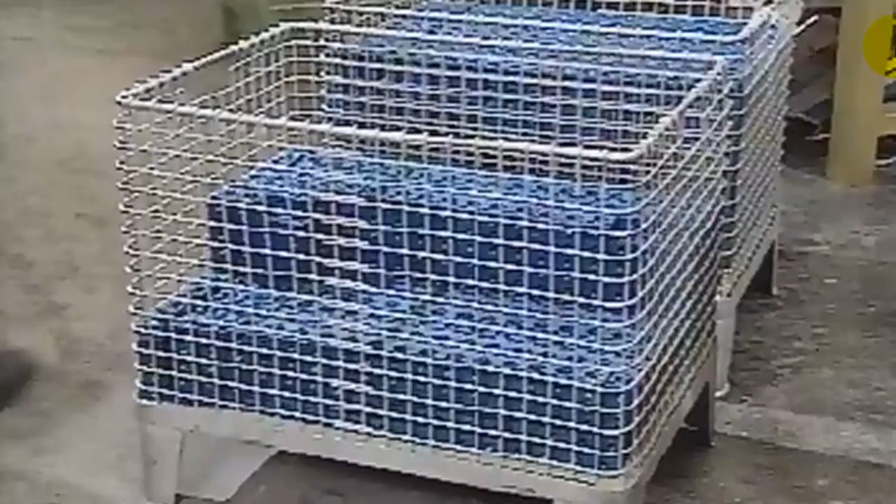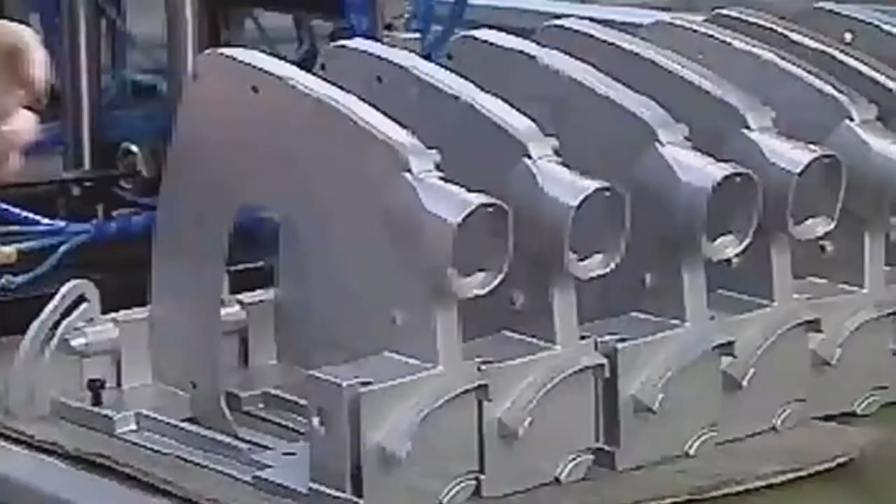Every manufacturing process involves a series of constantly recurring operating steps. Workpieces must be loaded, clamped, machined, or conveyed on to the next station, always in exactly the same way. When performed by muscle power alone, these operations become tiring and time-consuming. That's why jobs of this type are more and more becoming a thing of the past.

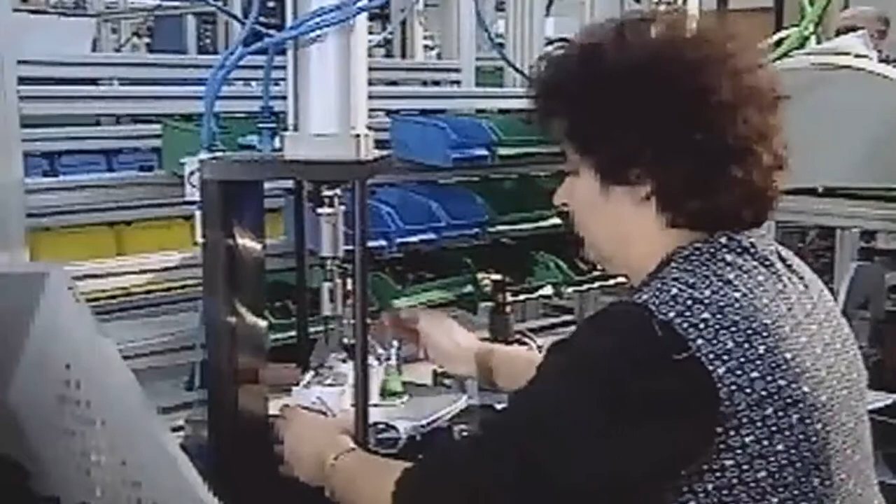Mechanization and automation have become key words in industry today. They both refer to using the right kinds of machines and equipment to relieve personnel of strenuous routine activities.

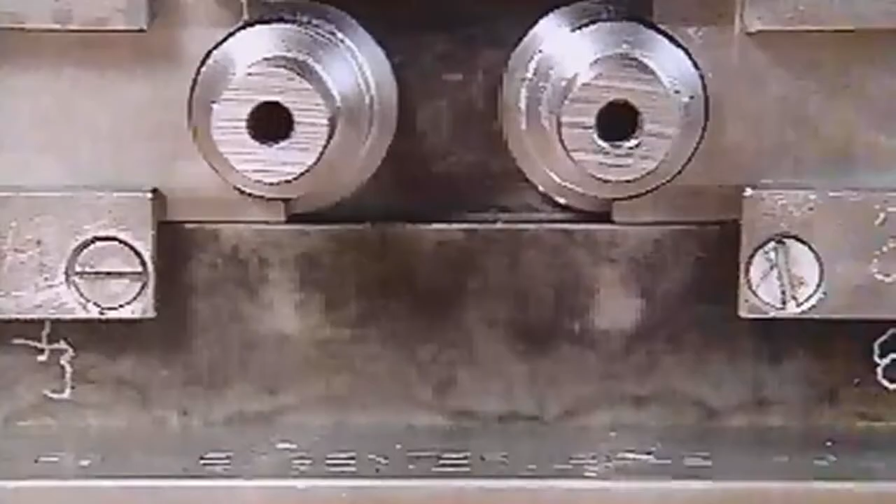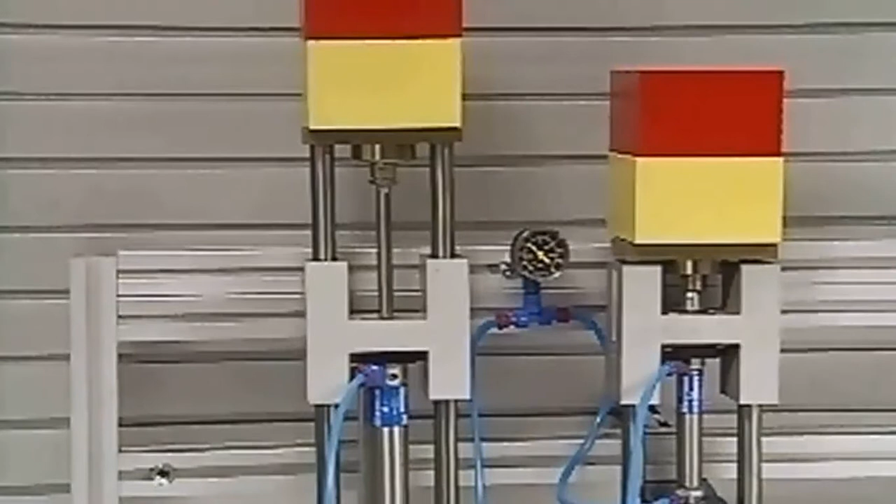In this experiment, the cylinder is not capable of raising the load. Not a problem for the left-hand cylinder, even though the same working pressure is being applied to both. The reason is that the left-hand cylinder has a larger diameter.

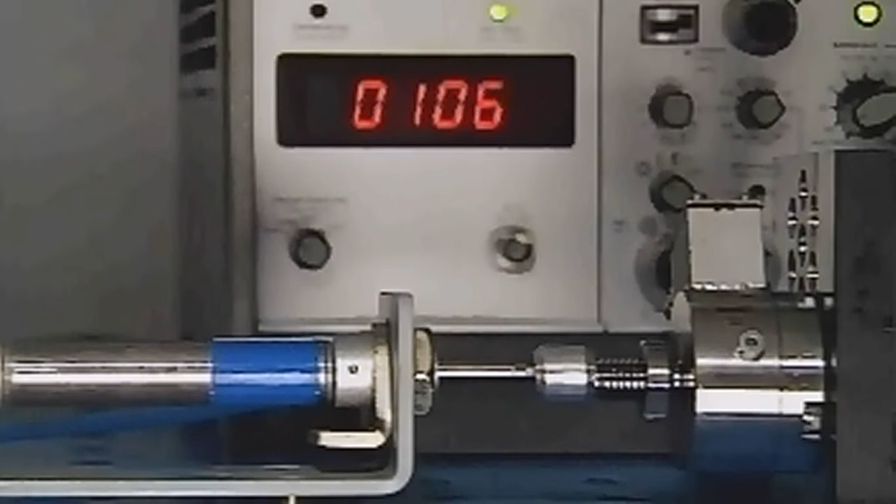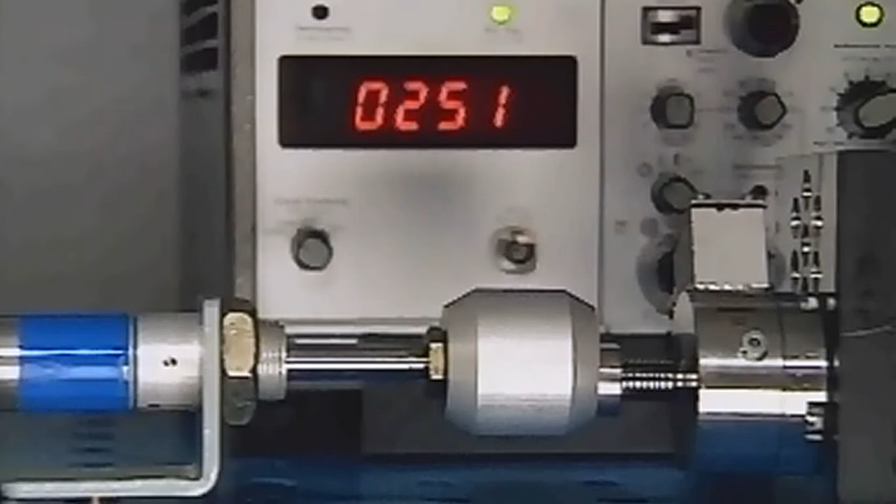This experiment shows the same thing again. At an identical working pressure of 600 kilopascals, this small cylinder, with a piston diameter of 16 millimeters, registers about 106 newtons on the scale, whereas the larger 25 millimeter piston exerts a force of about 251 newtons. And this cylinder, with a piston diameter of 32 millimeters, exerts about 420 newtons.

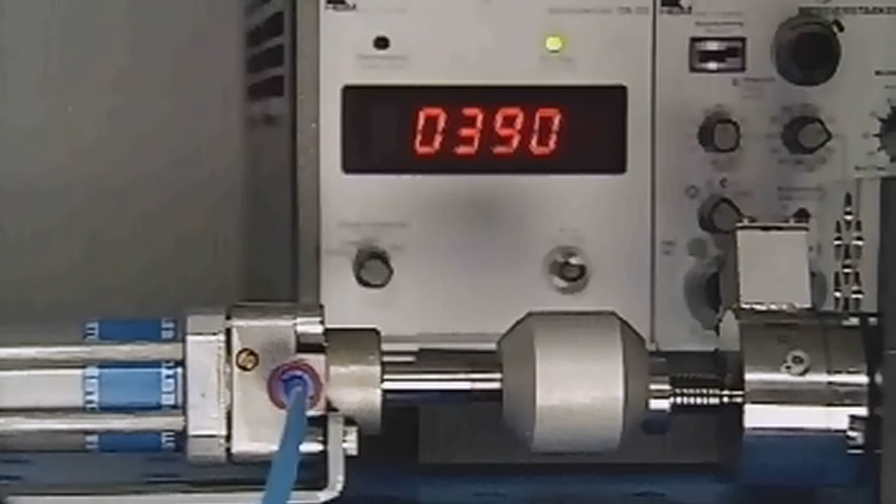This can all be reduced to the formula: force F is equal to the surface area of the piston times the operating pressure.

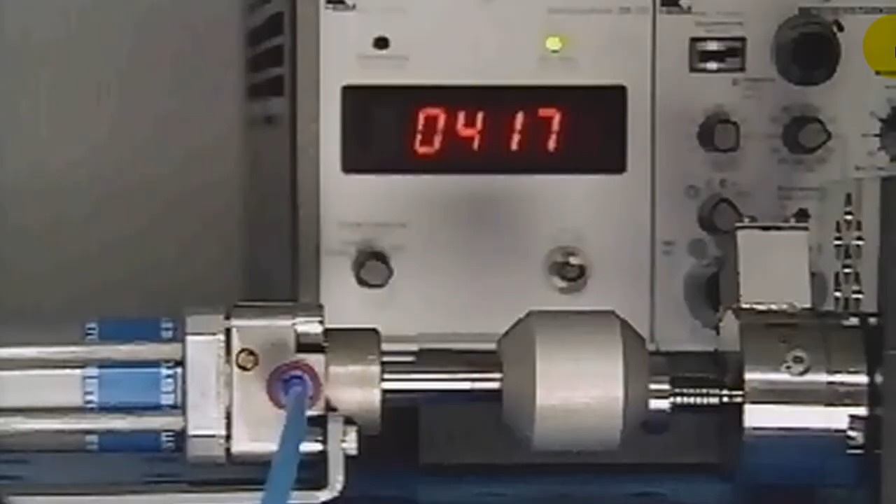An atmospheric pressure P at prevails over the entire Earth. Although the pressure varies slightly due to geographical and climatic conditions, it's taken as a reference parameter and for technical purposes set at 100 kilopascals or 1 bar.

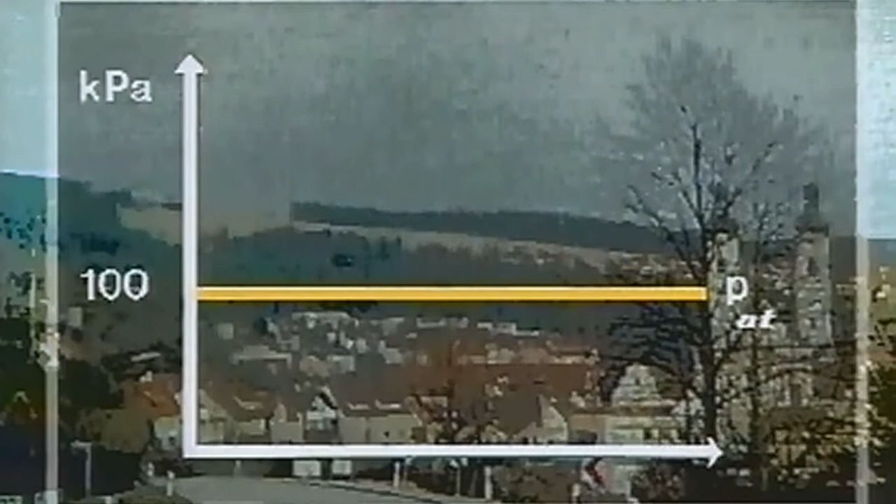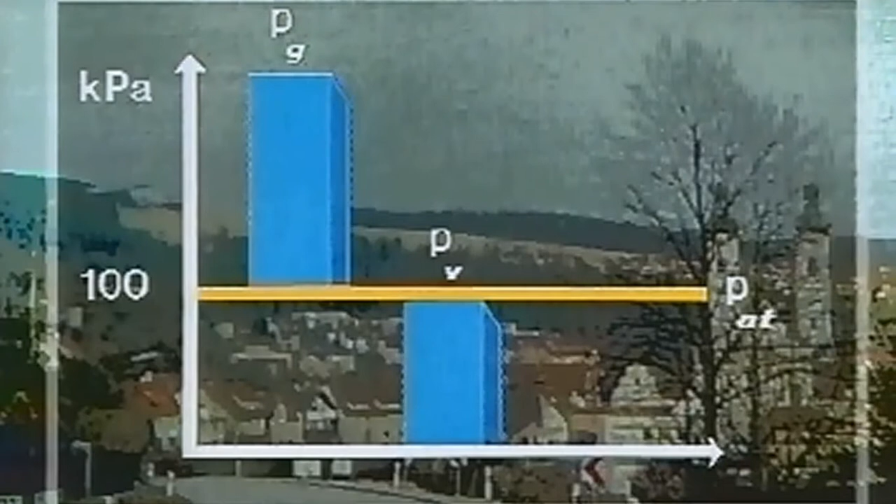Any higher pressure is described as gauge pressure PG. This pressure is normally indicated by the pressure gauges of pneumatic systems. Pressures lower than 100 kilopascals are described as vacuum PV. Pressure P absolute is calculated beginning at zero pressure.

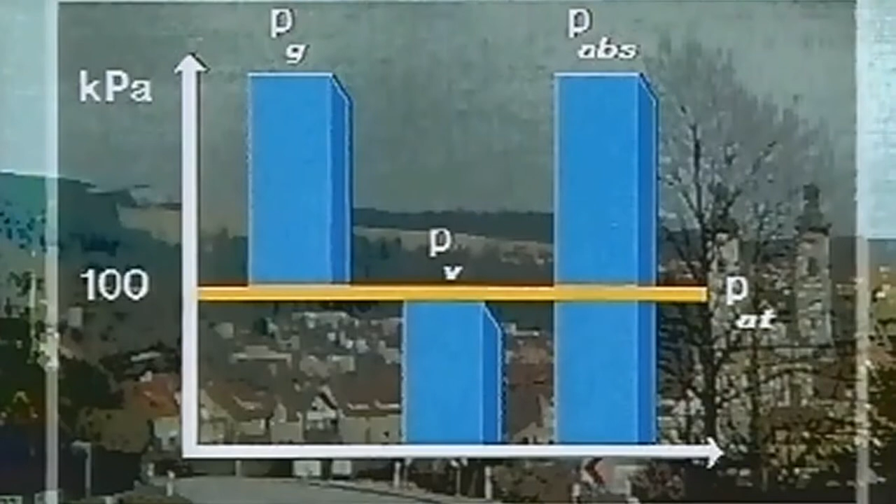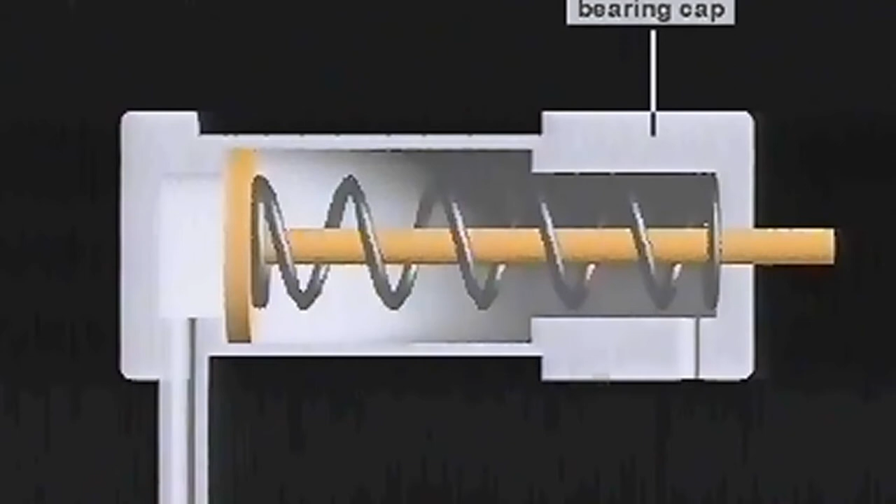A single-acting cylinder is made up of the following component parts: the base cap, the bearing cap, the cylinder barrel, the piston and seal, the piston rod, and the return spring.

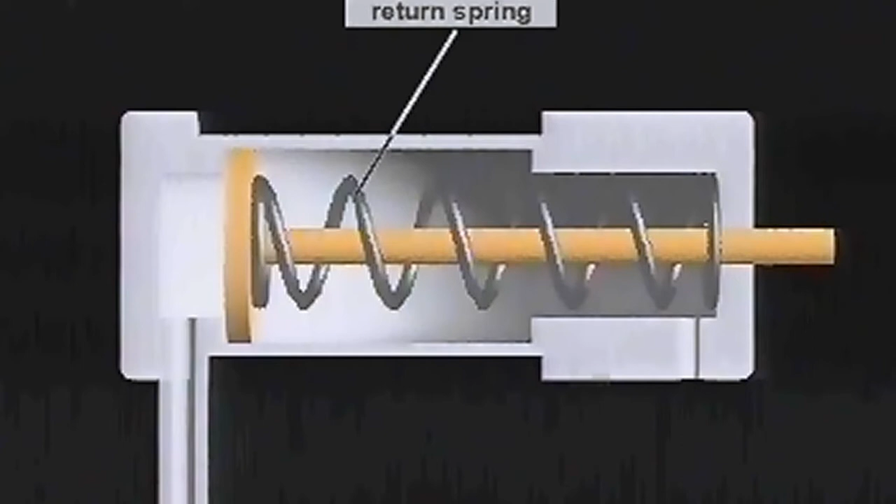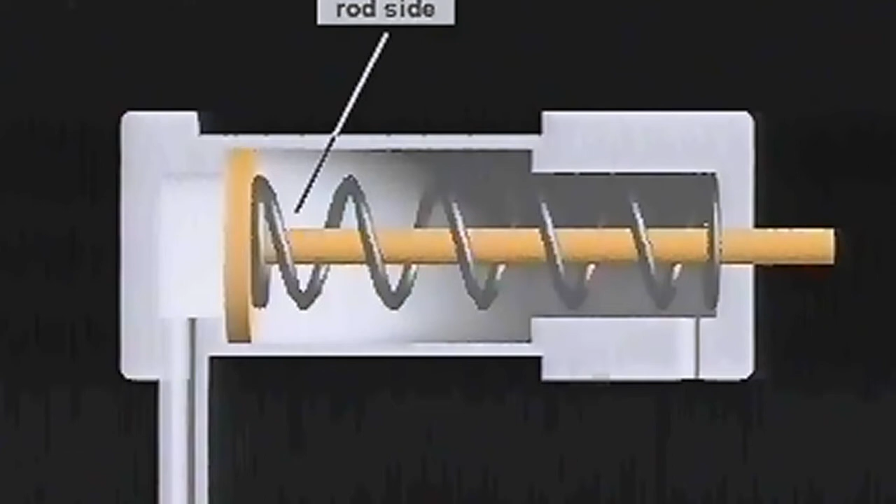A distinction is made between the piston side and the rod side. There must be no pressure buildup on the rod side during the forward stroke, which is why there is an exhaust hole in the bearing cap.

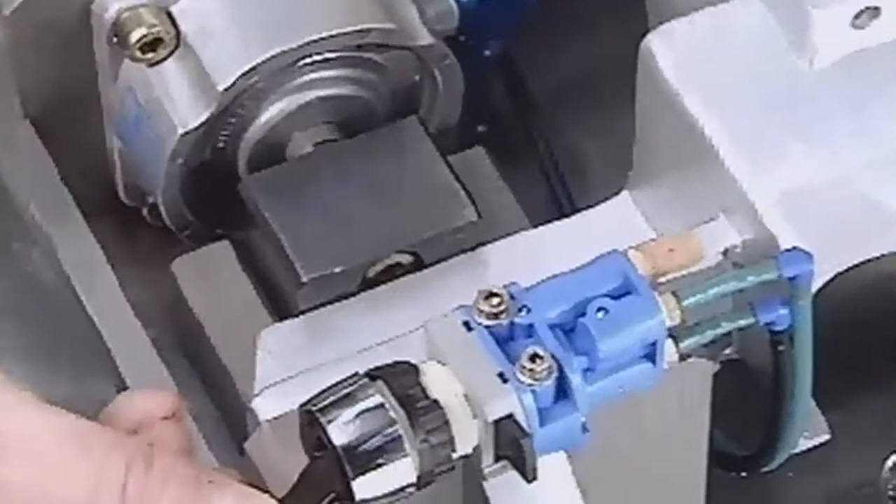These single-acting cylinders are being used for clamping. And this cylinder for ejecting.

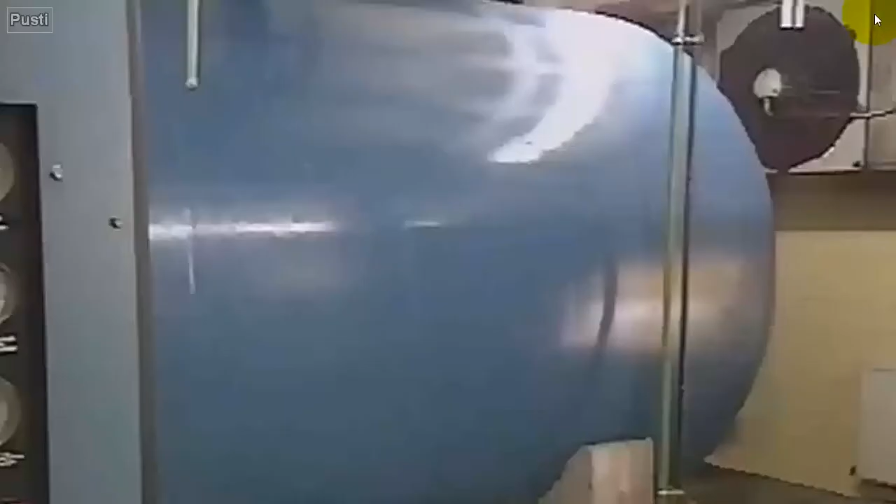The compressed air, which heated up during compression, is cooled in the compressed air receiver. The resulting condensate is drained off.

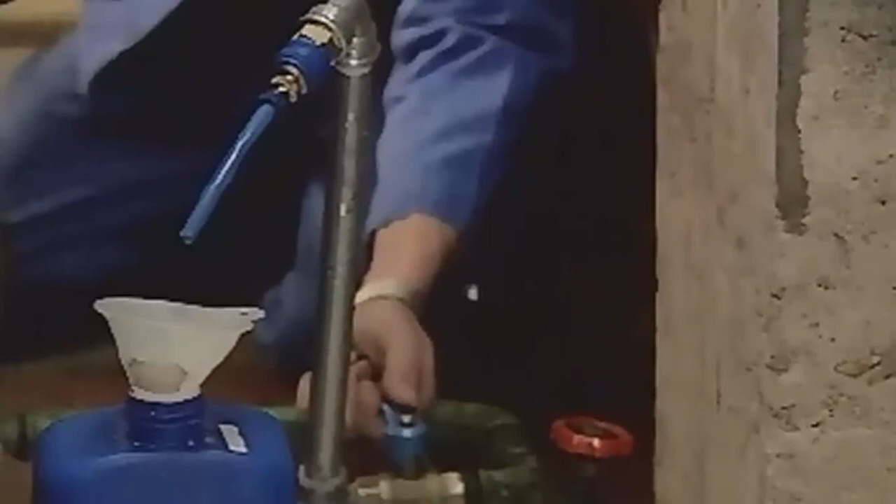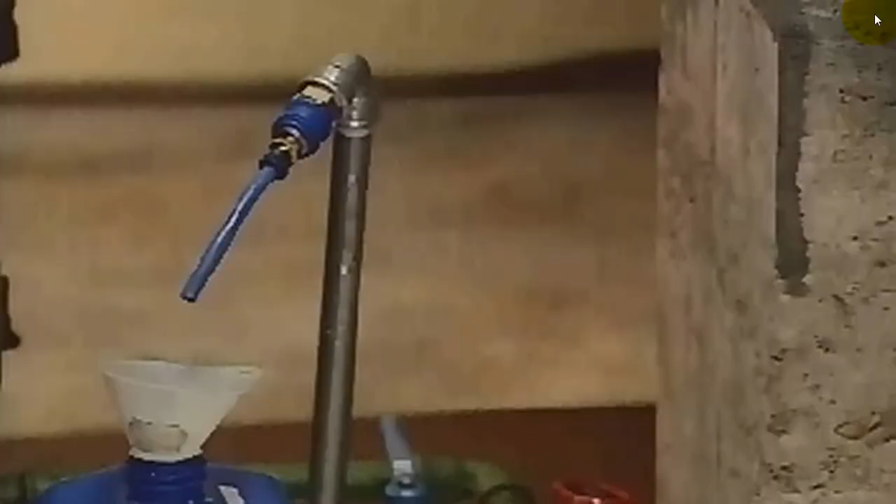And now to the second type of cylinder, the double-acting cylinder. Unlike the single-acting cylinder, it has two compressed air ports.

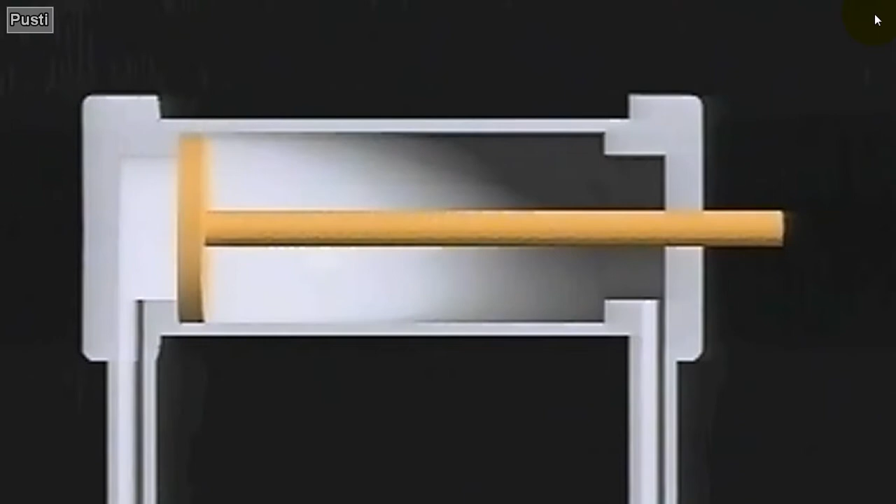Compressed air moves this piston in both directions, which means that double-acting cylinders can perform work on both the advance and the return stroke.

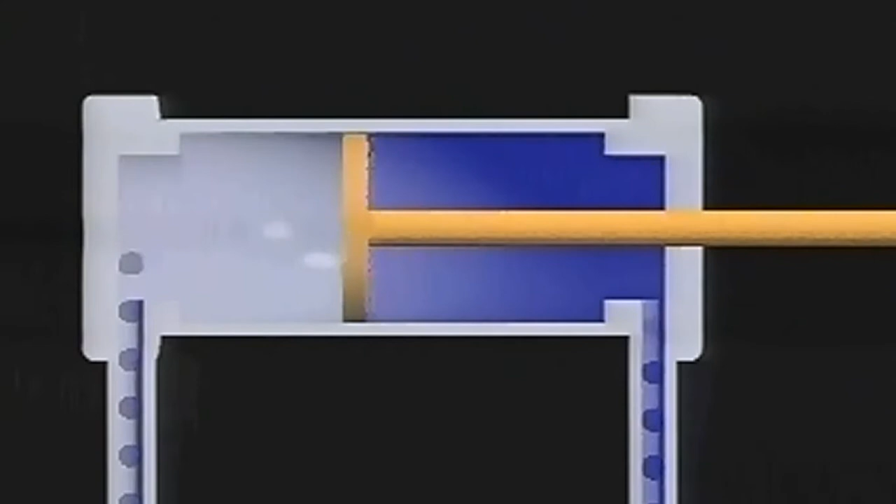The force exerted on the return stroke is less than the force on the advance stroke. This is because the effective surface area on the rod side of the piston is reduced by the area of the cross-section of the piston rod.

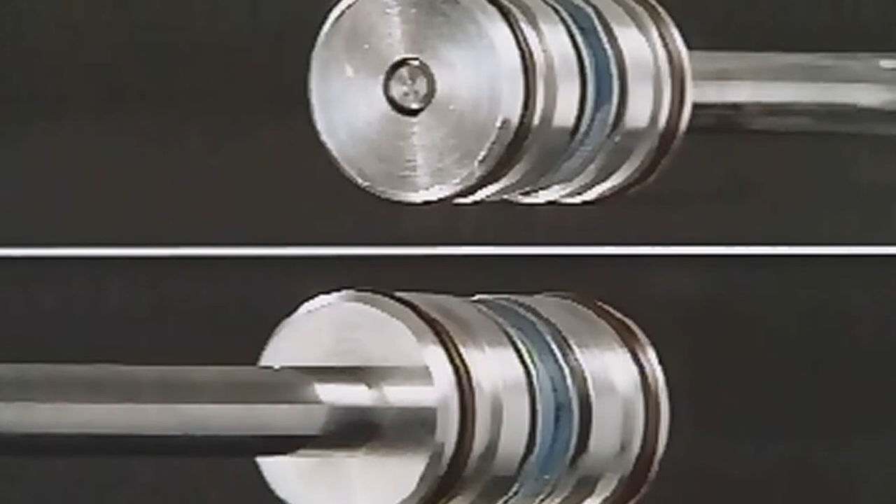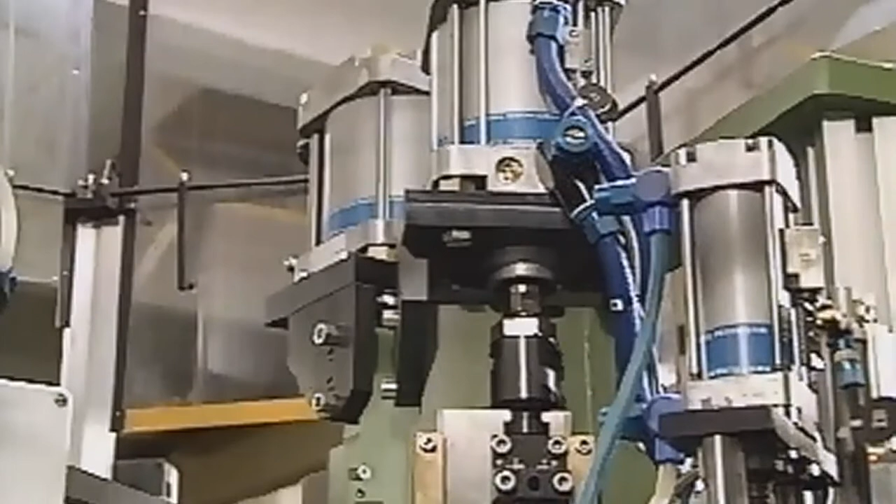Because of the weight of this tool, work has to be done on both the advance and return stroke. Here we need a double-acting cylinder.

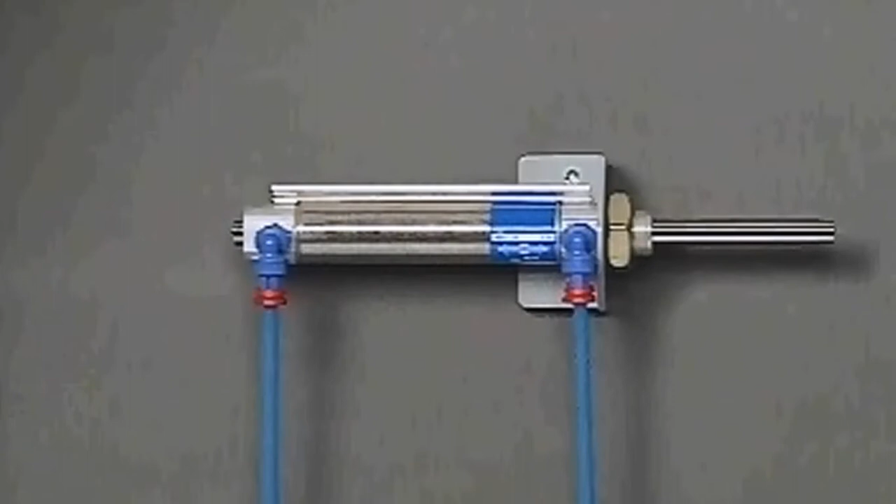Now let's take a look at a few special types of cylinder, all of which are derived from the double-acting cylinder. For example, cylinders with double-ended piston rods.

Two-point bearing support makes for precision rod guidance and greater lateral load-bearing capacity.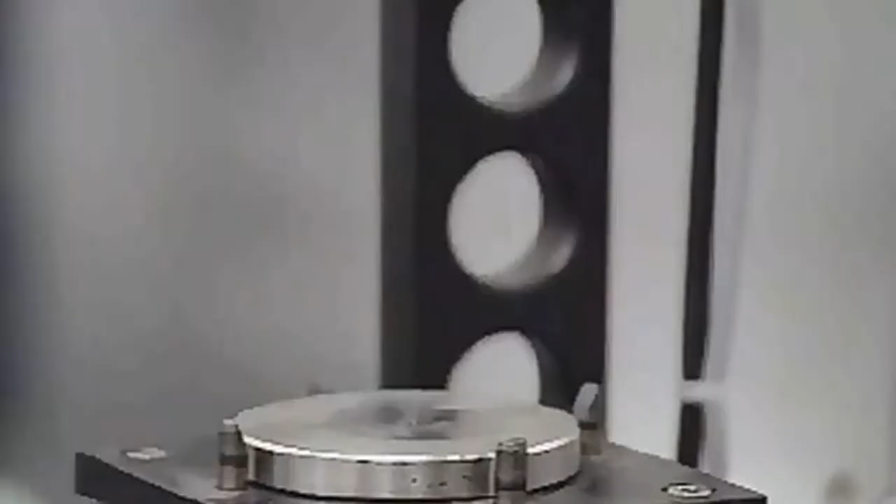In this cylinder, the partial vacuum needed for a suction cup is supplied through the hollow piston rod.

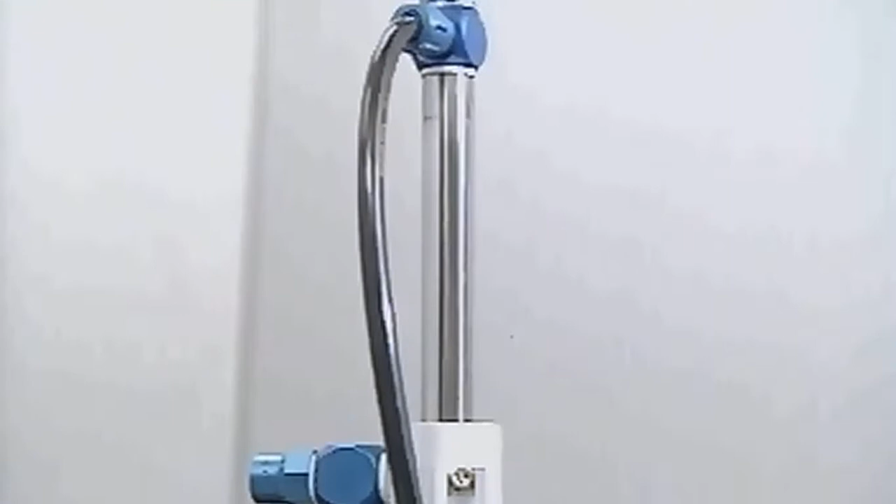This cylinder has no piston rod at all. It's connected by permanent magnets to the outside of the cylinder barrel. This way, the slide moves whenever the piston moves.

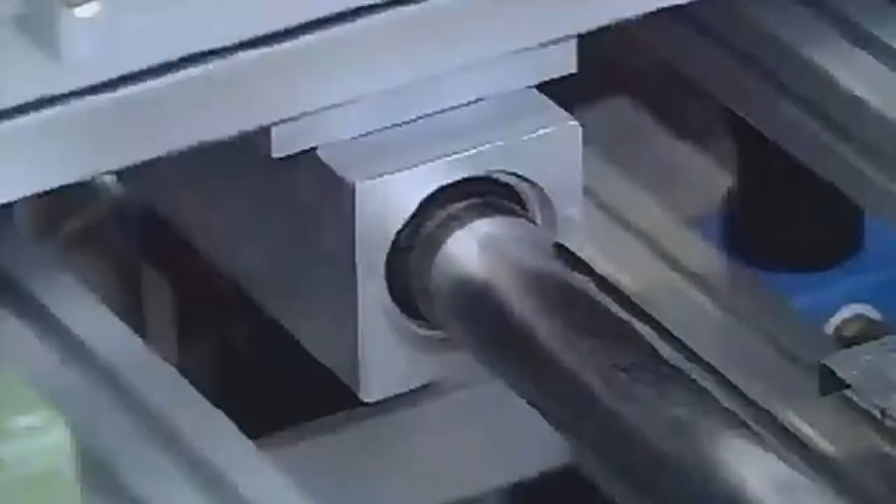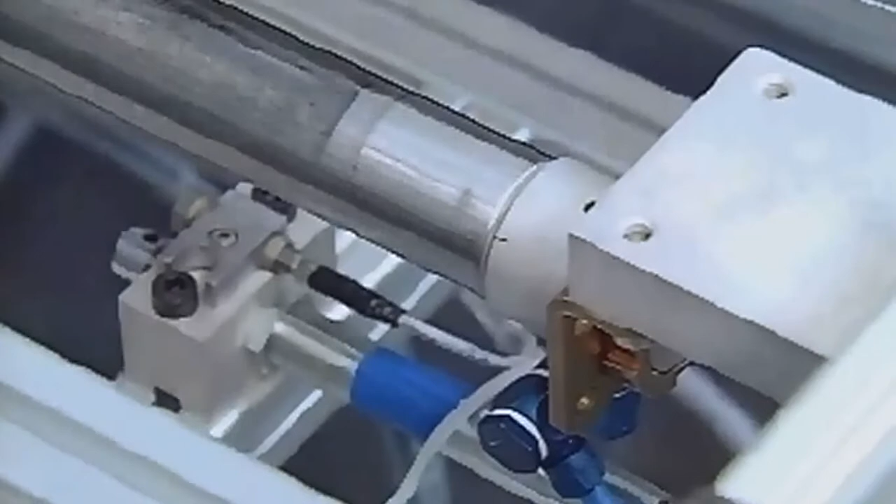Rodless cylinders can be used for extremely long stroke lengths of up to 10 meters.

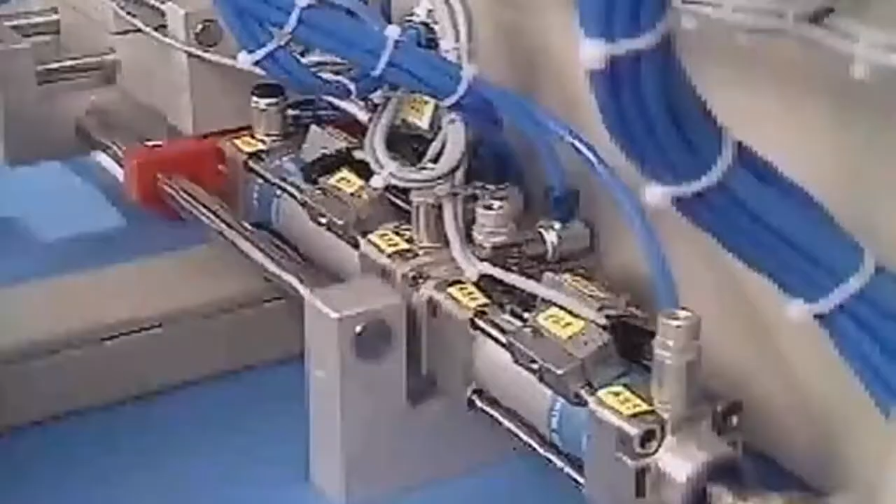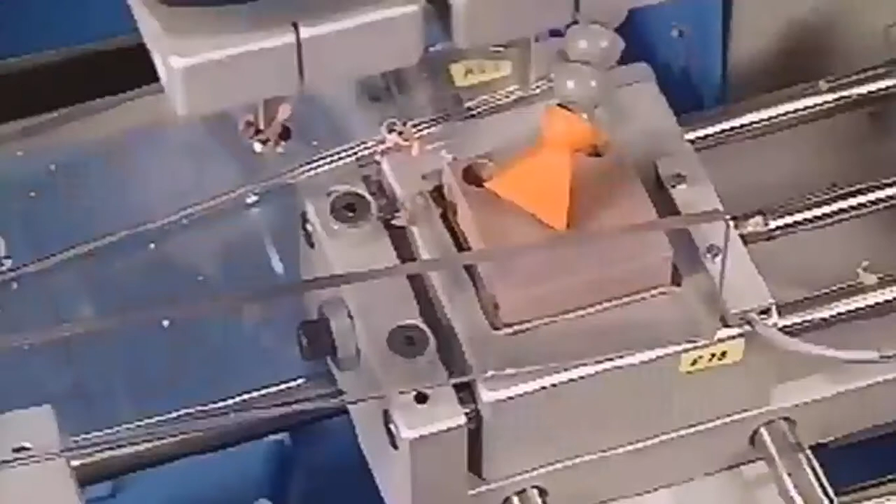Another special type of cylinder is the multi-position cylinder, which consists of several double-acting cylinders joined together. The one shown here has two sub-cylinders with different stroke lengths, making it possible to move the workpiece into 4 different machining positions.

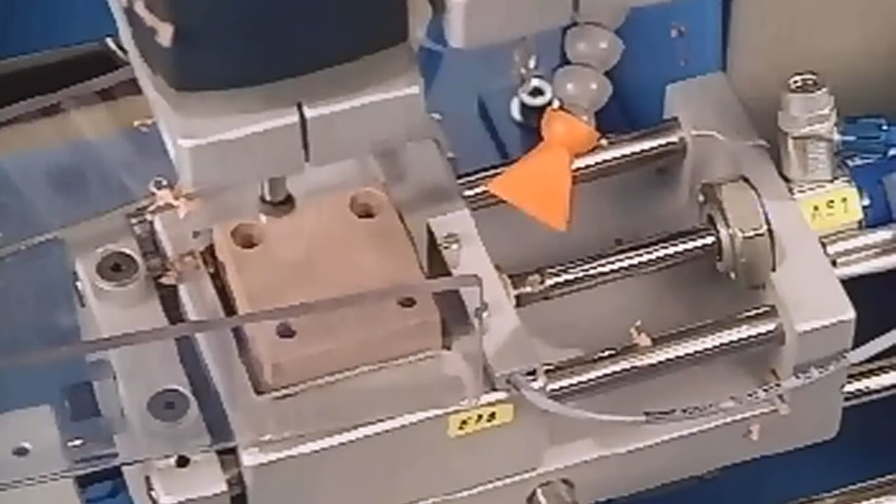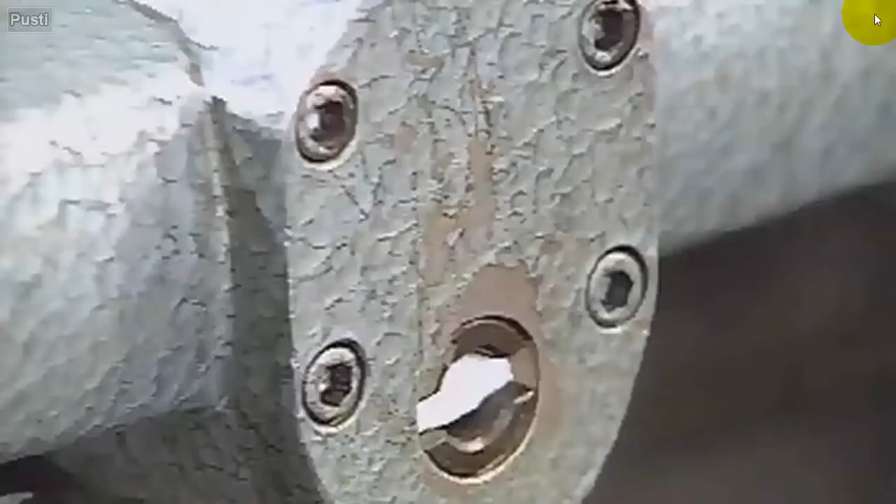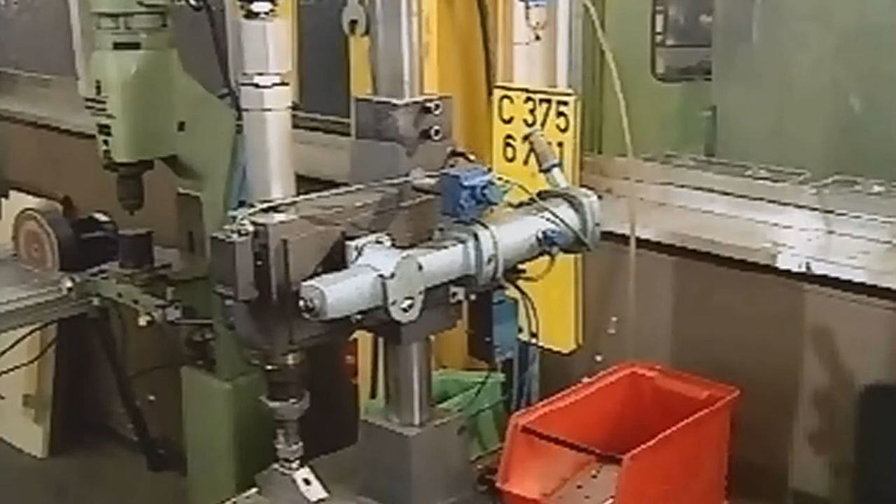If a rotary drive unit is needed, the cylinder's linear motion can be converted mechanically into rotary motion. If this conversion takes place within the cylinder itself, we speak of a rotary cylinder. The piston rod of a rotary cylinder has a tooth profile that drives a gear wheel.

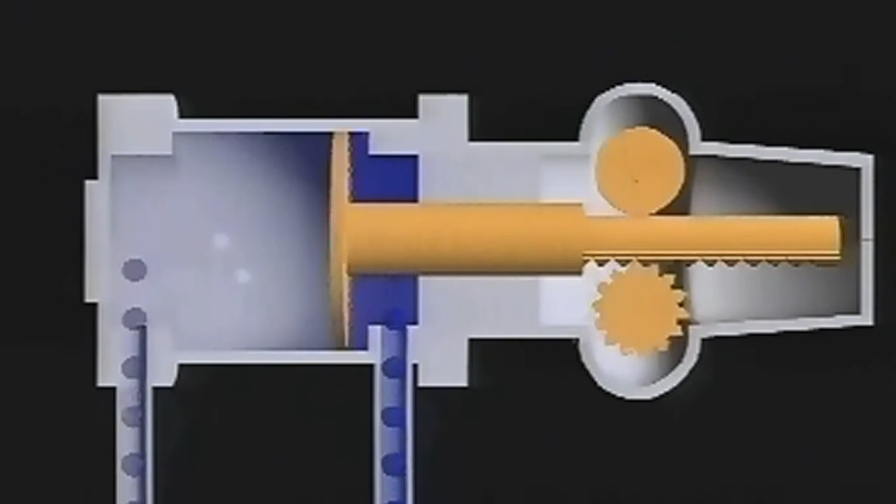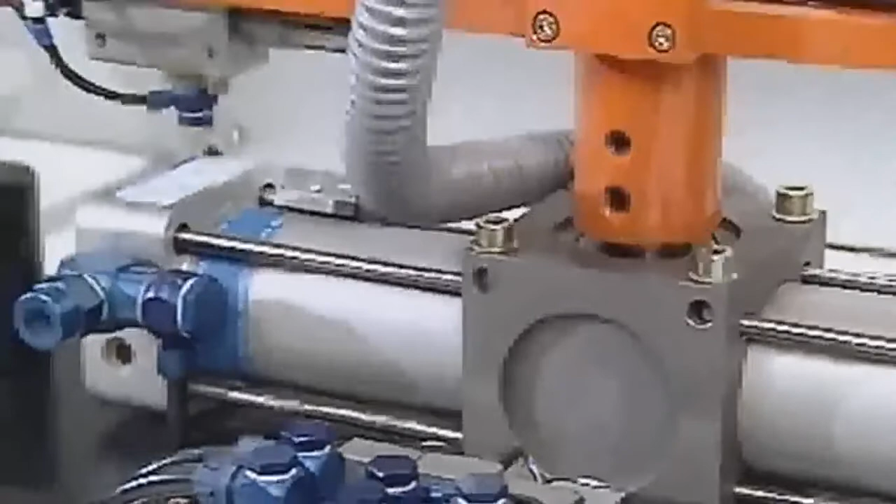This handling device uses a rotary drive, with the rotary motion being produced at the center of the cylinder.

Now let's take a look at the product of volume and absolute pressure. This container holds 2 liters of air subjected to an atmospheric pressure of only 100 kilopascals. 2 times 100 equals 200.

If we compress the air to 1 liter, the pressure is doubled to 200 kilopascals. 1 times 200 equals 200. If we compress the air even further to half a liter, the pressure rises to 400 kilopascals. The product of volume and absolute pressure always remains the same.

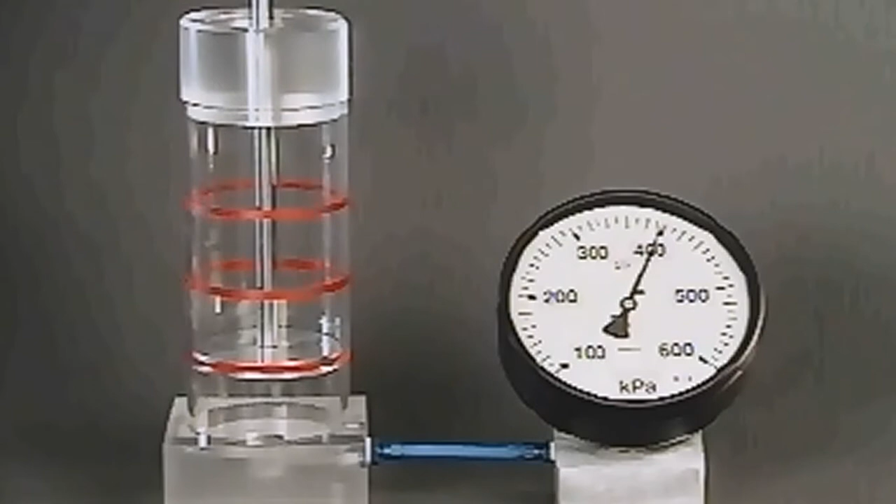Smaller forces and compact dimensions are needed for this screen wiper on a CNC machine. Here's another pneumatic rotary drive that has proved to be effective, the rotary vane cylinder.

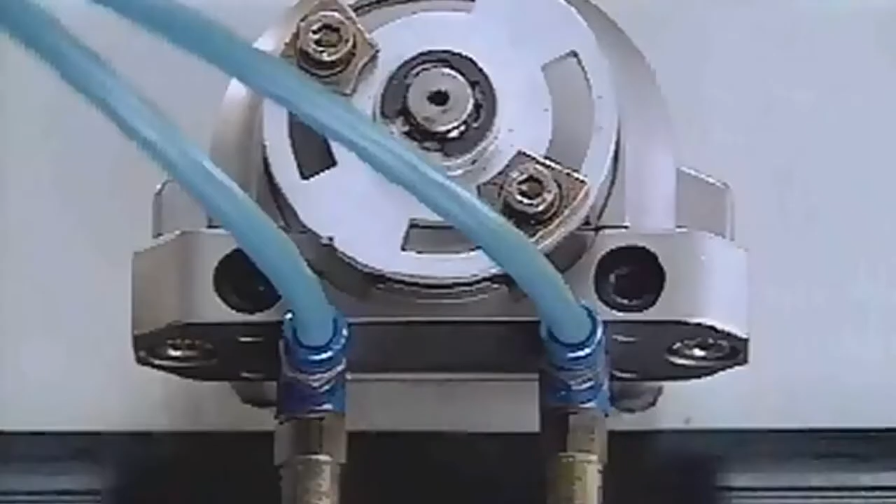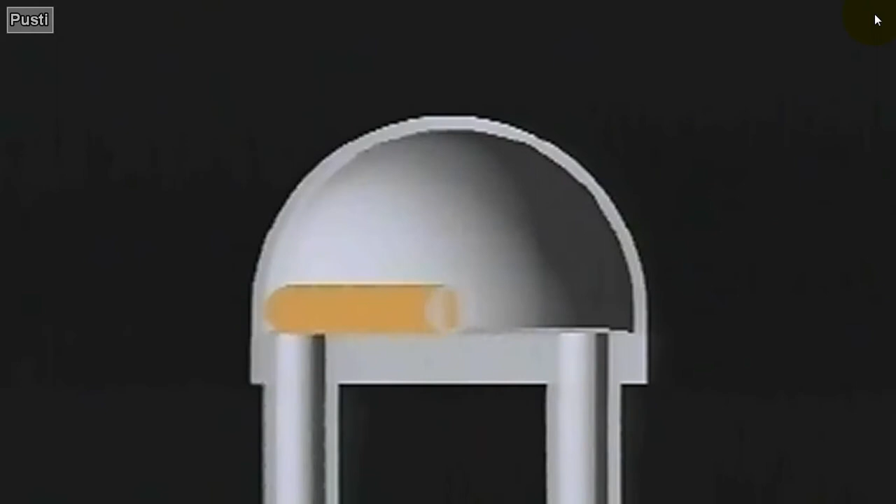In a rotary vane cylinder, the energy of the compressed air is converted directly into rotary motion. The compressed air acts on the rotary vane.

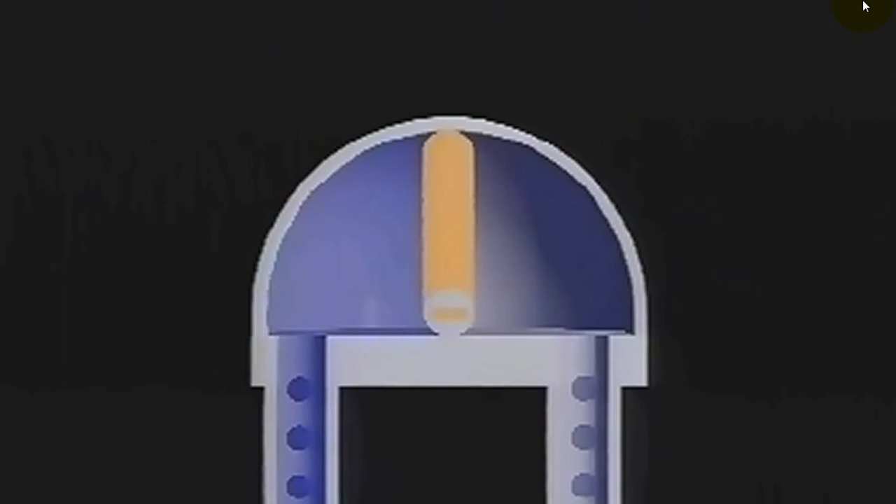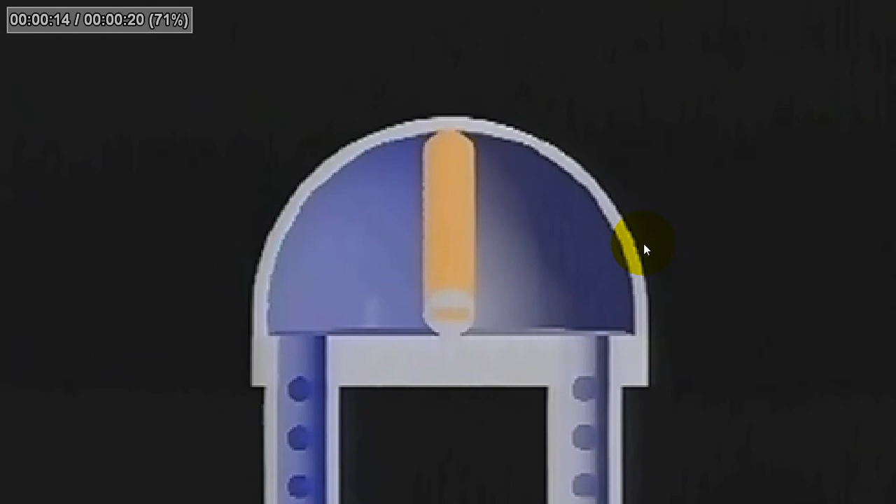Here a rotary vane cylinder: the air acts on the rotary vane. The rotary vane transmits the force to the drive shaft.

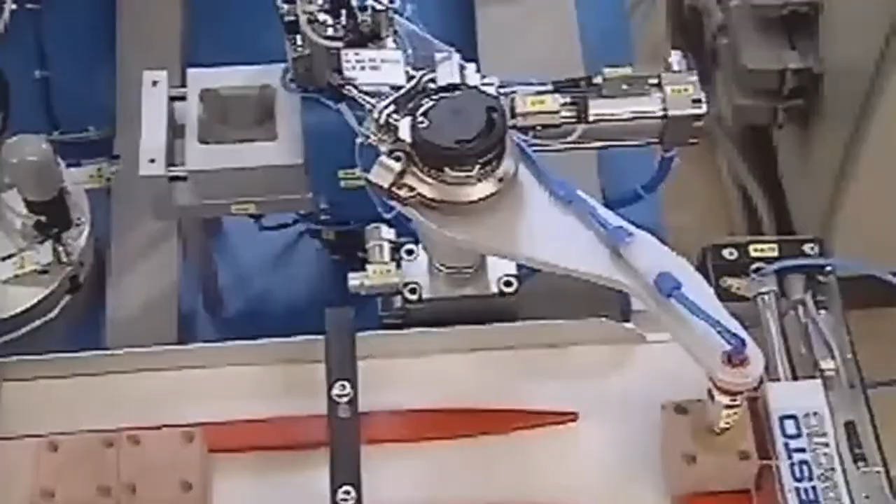Here a rotary vane cylinder is being used to power a swivel arm, and here for turning workpieces.

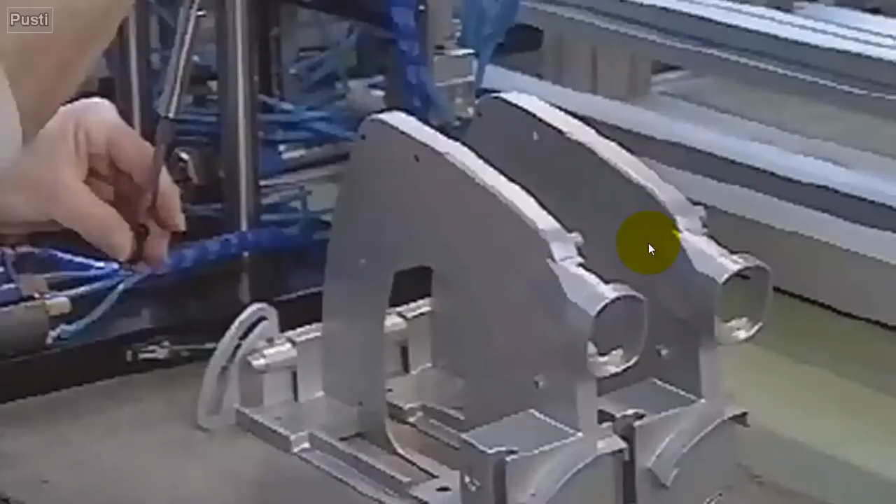This pneumatic screwdriver is powered by a vane motor. One important advantage of the vane motor is that despite its small dimensions and low weight, it still has a relatively high power output.

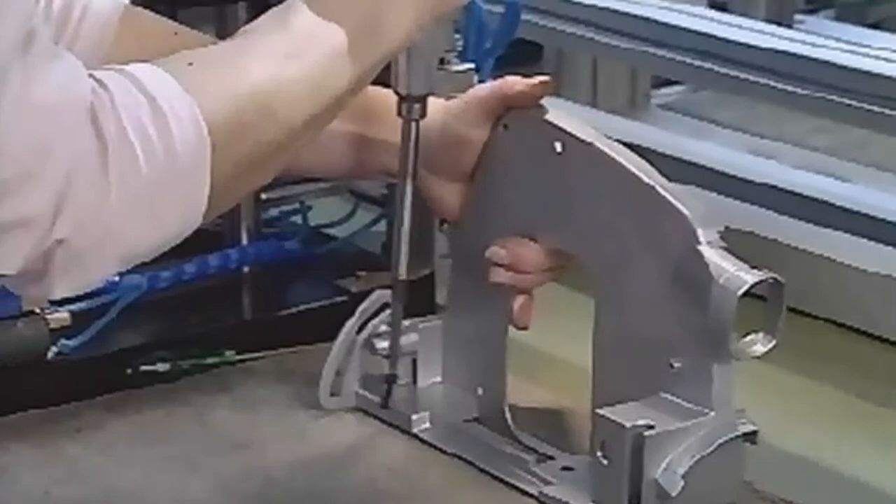Rotational speeds usually lie between 3,000 and 8,000 revolutions per minute.

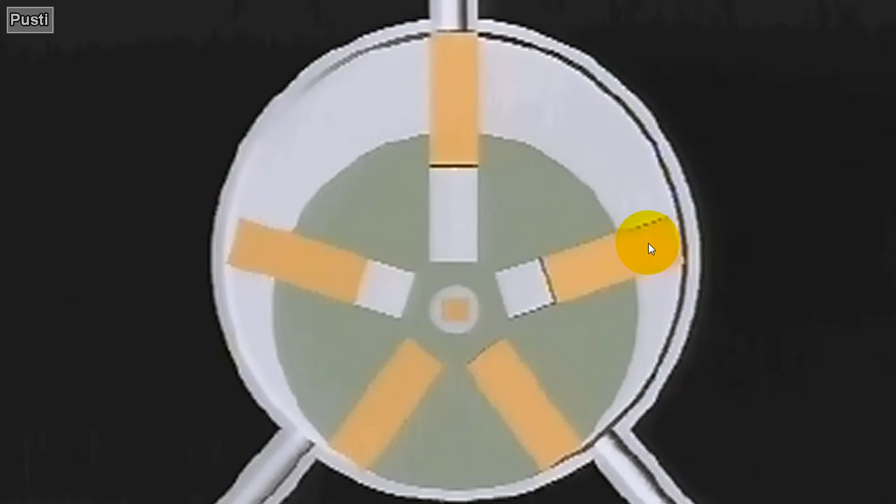An eccentrically mounted rotor runs in a cylindrical chamber. The sliding vanes on the rotor form pressure chambers of varying size.

Compressed air flows into the smallest chamber and sets the rotor in motion. As the chamber increases in size, pressure drops and the air can escape into the atmosphere. Vane motors can be designed to run clockwise, counterclockwise, or with a changeover function.